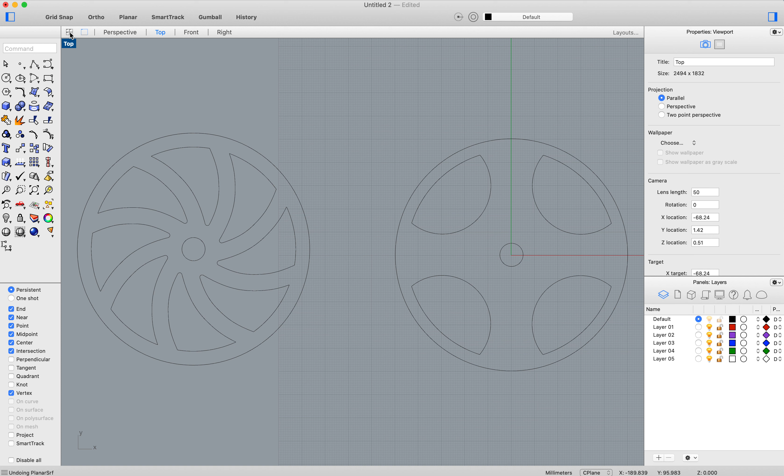So we need to go back into our 4 views. You either double click top or press the little 4 button. Now we can see this perspective view over here. What we've drawn at the moment is completely flat, which is why we can't see it in here. If your views are all squiff and you can't see stuff, you go Z, A, E, and it moves everything till you can see all your wheels.

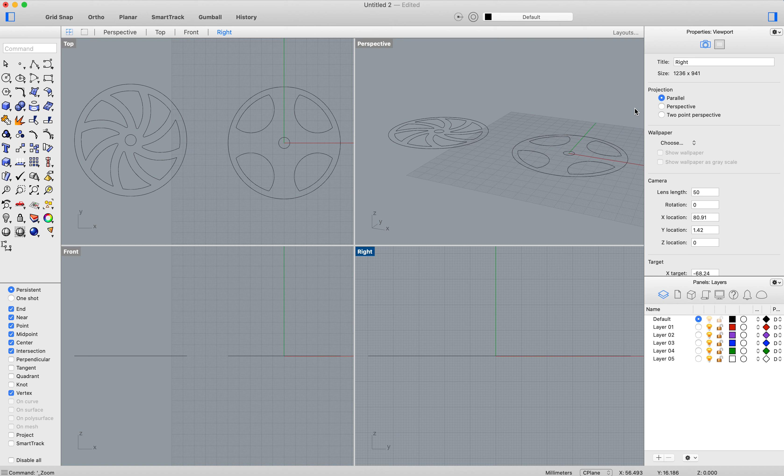I'm going to delete this one, so I'm not going to work with this one. Z, A, E, so I'm just going to work with this one.

So I can turn this very easily into a 3D shape by using what's called planar surface. If you click and hold this surface, the first surface one is this one here, or you can write planar, planar surface. Select the curves that you want to build a surface from, press enter.

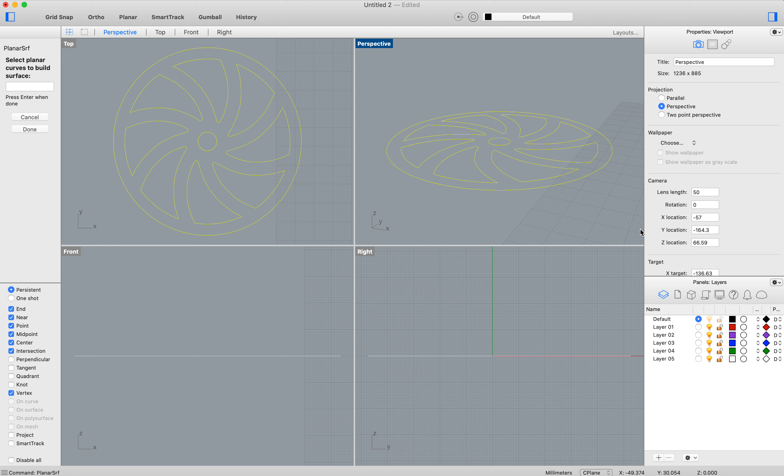At the moment you can't see it because this is not shaded. So if you right click where it says perspective, change it to shaded, you will be able to see that you have a surface. The 3D printer can't print this yet because it has no thickness.

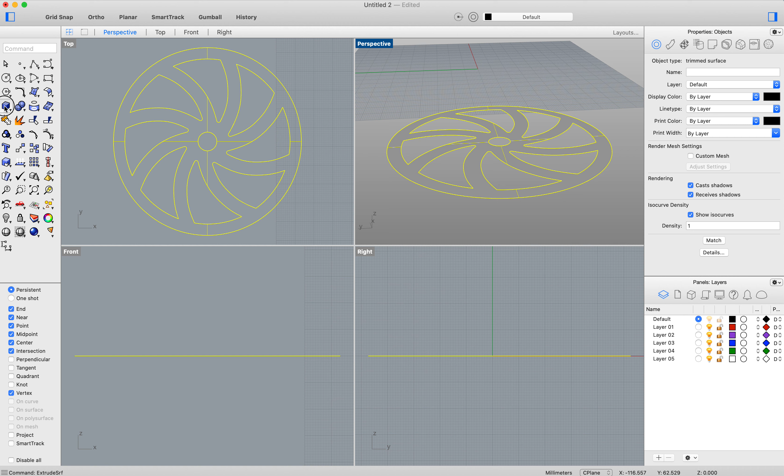So we can turn this into a thicker object. The simplest way to do this is to extrude this. Extruding something basically means pushing it out. So if you write extrude surface, or you can find that command down the bottom of here.

You tell it how far you want it to go. It needs to have this turned on, because if you don't turn this on, it will not extrude it as a solid, it will extrude it as surfaces. So click that, tell it how far you want to go, so we're going to make it 20 millimeters, or you can click. Okay, now I have a wheel that the 3D printer can print.

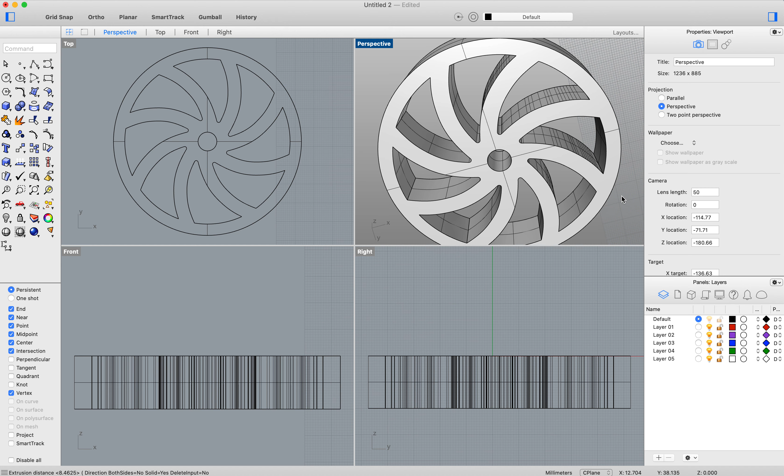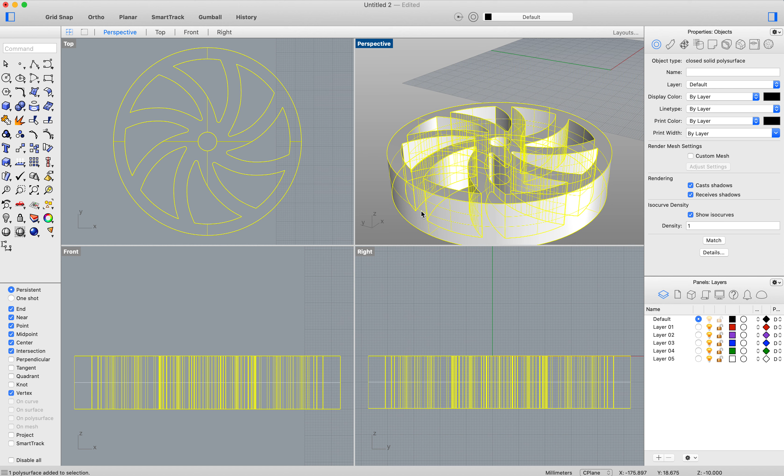Same as the last thing we did with exporting something, we want to export just the object that we want to 3D print. We don't want to export anything else. We don't want to export the surface. We don't want to export these lines out here. So we just click the thing that we want to export, and we go File, Export Selected.

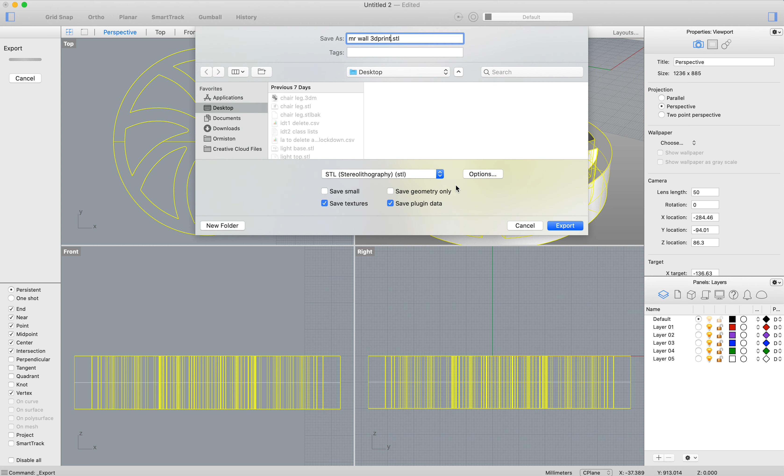This time the 3D printer uses an STL file, so go right down here till you find STL. This time when we click options, when you click export, it should give you some options. The tolerance, you want this to be 0.01 millimeters, which is as fine as it can be.

And then export. Alright, and then you've exported a mesh object that you can then send to me that we can 3D print.